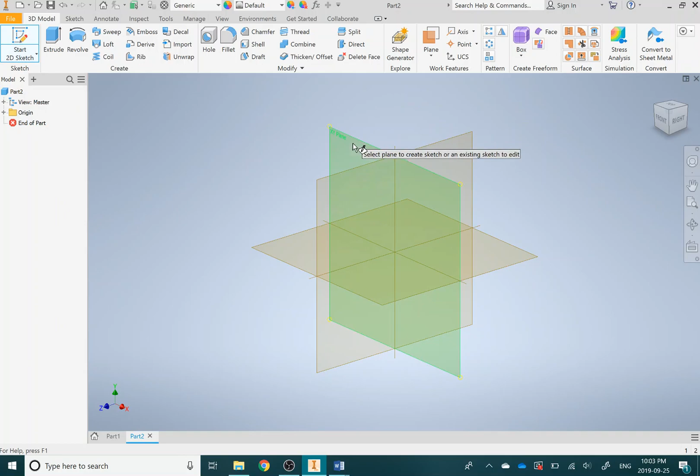Overwrite. Done. Now click on Part. It's going to take a moment to load. It's going to look like this, or very similar to this. Let's start drawing. You need to start off with a 2D sketch up here in the corner. And click on one of these planes right here. I'll click on the XY plane. And I'm going to start a 2D sketch of what I want to make.

Let's just make a rectangle. Any size, because we're going to actually dimension it afterwards. So I'm going to click on the dimension button. Click on this top piece. And you want to make it 10 millimeters for every letter, plus about another 10 millimeters. So I'm going to do 4 letters. I'm going to do 50 millimeters wide.

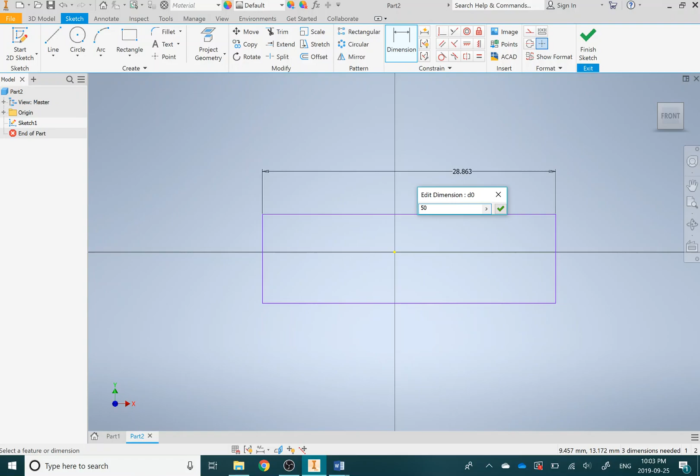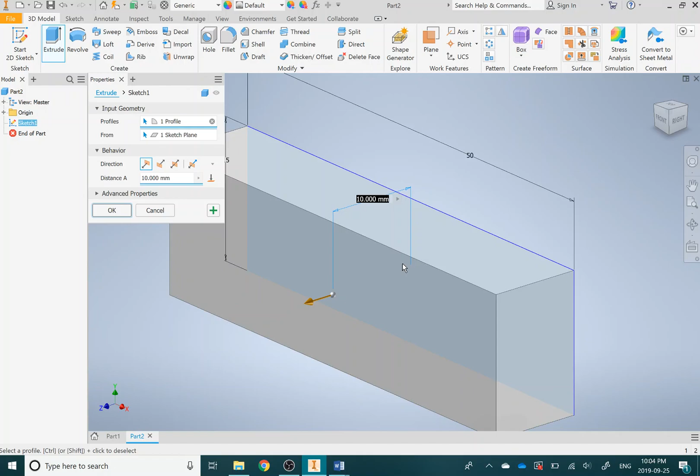And still got the dimension tool selected. I'm going to click on that. I want to make that a height of 15. Okay, my basic box is made. Click Finish Sketch. Right now it's a 2D model. Let's turn it into a 3D model with Extrude. So I clicked on Extrude right here, and then I clicked on the profile that I want to extrude. I'll make it a little less, so let's extrude it 5. Hit OK. Model. My basic shape. All right, let's put a border on that and our names.

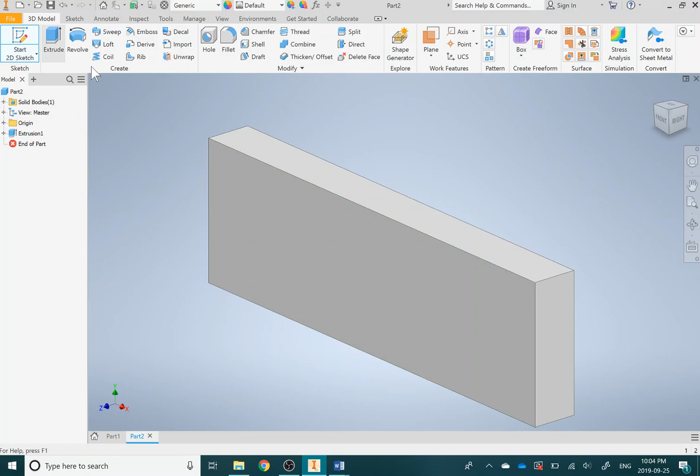So I'm going to start another 2D sketch. And I'm going to go down. I'm going to click on this face right here. And it's going to make the sketch right on there. First thing I want to do is I'm going to project geometry. Click in the middle and you see how the whole thing lights up. Actually, what that does is it brings the outside edges of this shape into the sketch.

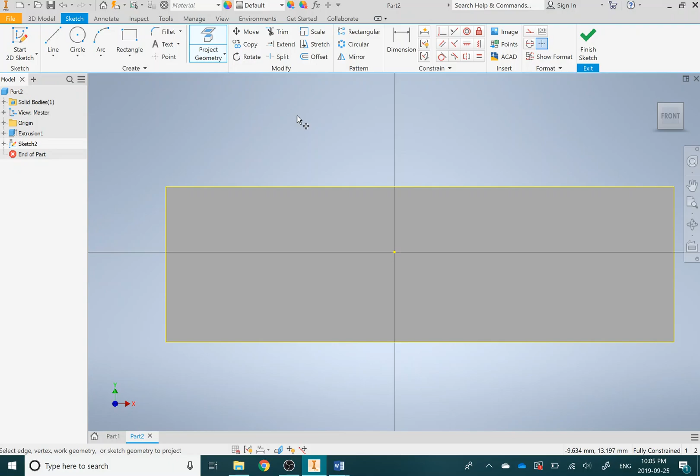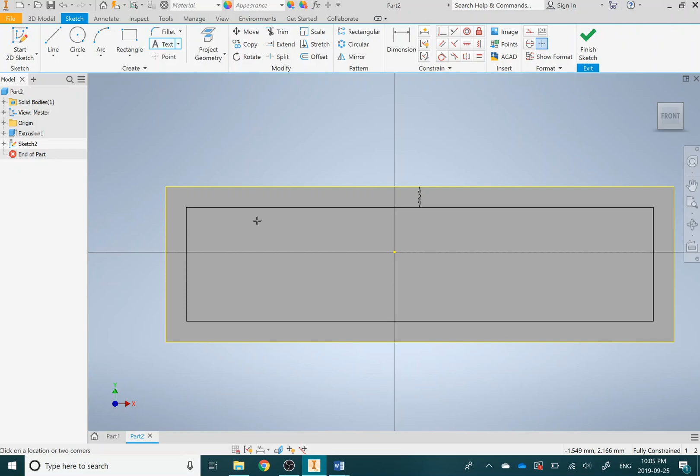All right, next, let's offset just like we do in AutoCAD. This edge right here, I'm going to offset it in. Let's go 2 millimeters. And hit escape because I've got that in. If you want to change it, I could just click it on here and type in a new number and it'll change for me. Next step, text. I'm going to draw a box right here, and that's where my text is going to show up.

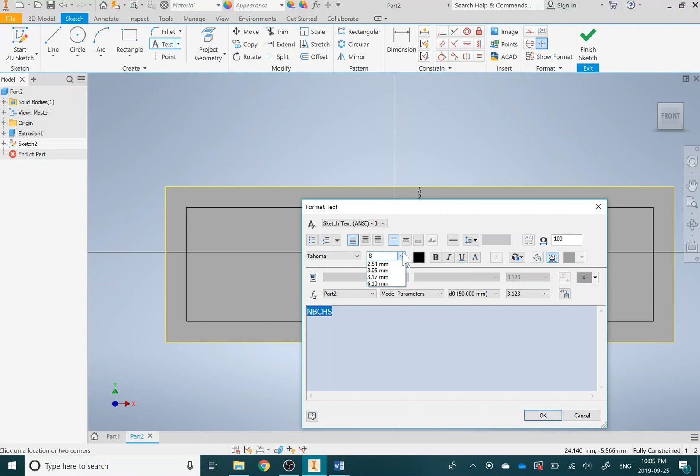Type in your name. I'm going to put NBCHS. You want to highlight those letters and change the size. You're going to play with this a little bit, but 8 millimeters seems to fit pretty good. Don't worry about the way it shows up here. You can go in here and you can pick some different fonts. Don't pick anything too scripty or flowing because thin parts aren't going to print very well.

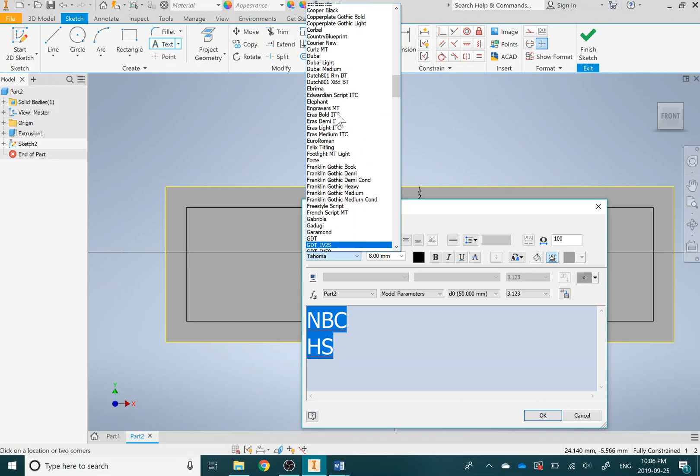There's a lot of fonts here and you're not going to know most of them. But I'm going to try this Cooper Black. Yeah, I like that. All right. There is my font, my text. So now I'm going to hit escape to get out of the text function. I can click on this and move it around. I want to center it as much as I can.

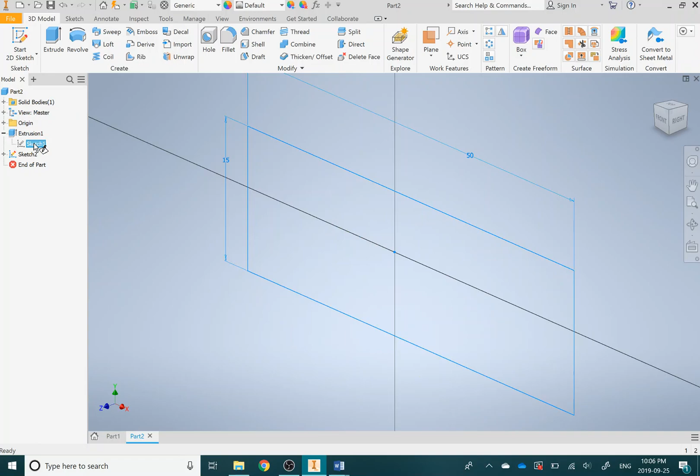Now the problem right now is I haven't left a spot to put a hole. So I'm actually going to finish this sketch. I'm going to click on the plus beside extrusion number 1. I'm going to go back into my original sketch. Double click on that. I didn't make it wide enough. So this dimension that I had up here, this 50, I'm going to make it 60 millimeters wide. Click the check mark, finish sketch, and watch what happens. It automatically makes it longer.

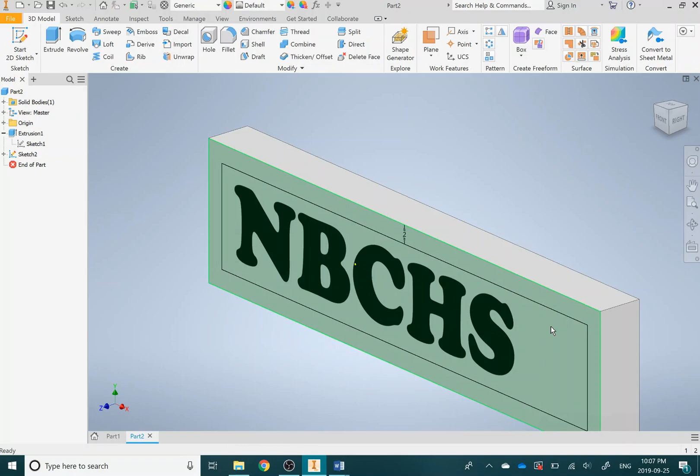Now I'm going to have to go back into sketch number 2. That was my lettering. Double clicked on that. I'm going to grab this, drag it over there, and drag it to where it looks about nice. I want to have a little bit of space on the top and the bottom and the right. Try to make it as even as you can. Perfect. I'm going to put a hole right here for a keychain. Finish that sketch.

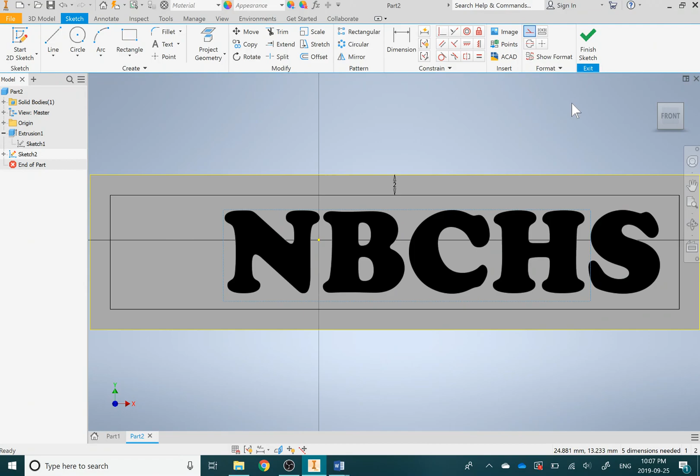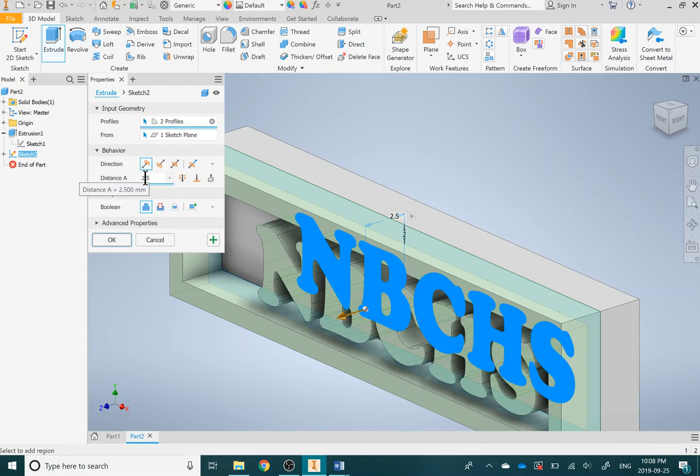Next step, I'm going to extrude one more time. Now I have to select profiles. I'm going to select this box around the outside. And I'm also going to select the letters. I don't want to extrude it 5 millimeters. I want to extrude it 2.5 millimeters. Hit enter. Hit OK. There. My letters extruded. Next step, let's put a hole in there.

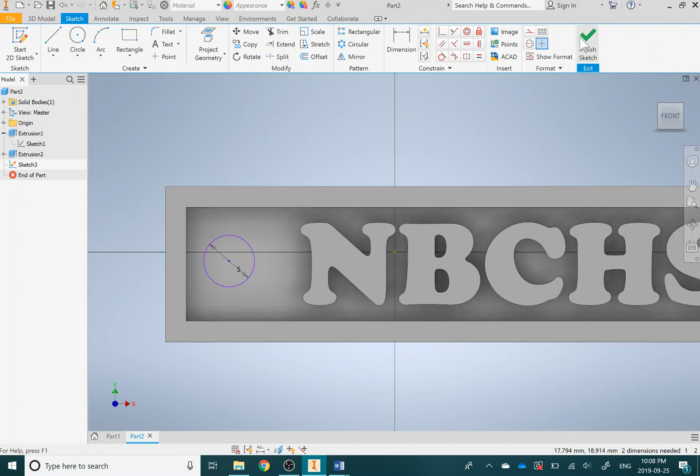I'm going to start a third sketch, and I'm going to click down here inside. Click on that. Click on the circle up here. Center it as best as I can. And I want to make it a diameter of 5. That looks pretty centered to me. If it's not, I can hit escape on the circle function. Grab this. I can move it around until I'm happy with where it is. Perfect. Finish that sketch. We are going to extrude it one more time.

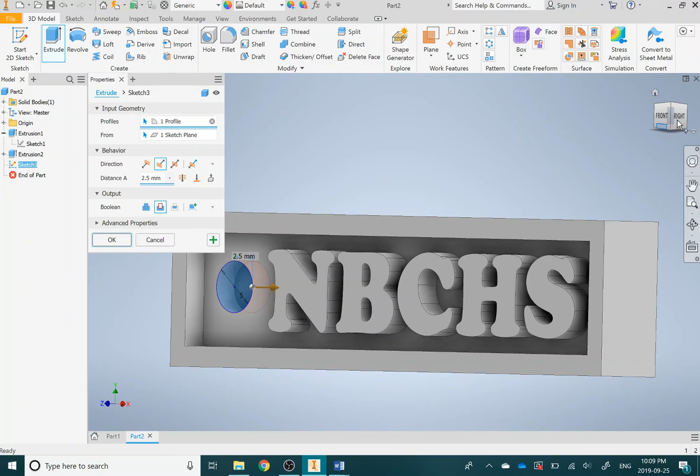But this time, instead of extruding it out, we want to extrude it in as a cut. So right here is the cut symbol. In other versions of Inventor, it might be in a different place, but it is still that same cut. Don't be afraid if you're having trouble seeing it. Grab on this box and rotate it. Now you need to grab this arrow, push it all the way past so it cuts all the way through. There's also an option to go through all, but depending which version you've got, it may look a little different. Hit OK.

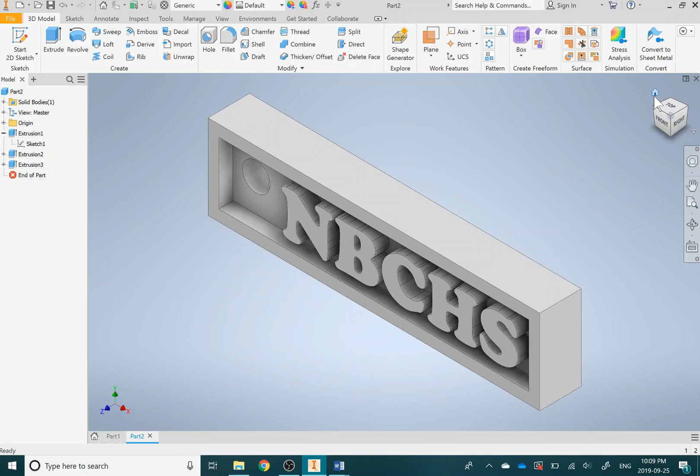There. My keychain. I can look at it through here. There's a hole for my keychain. There. Keychain.